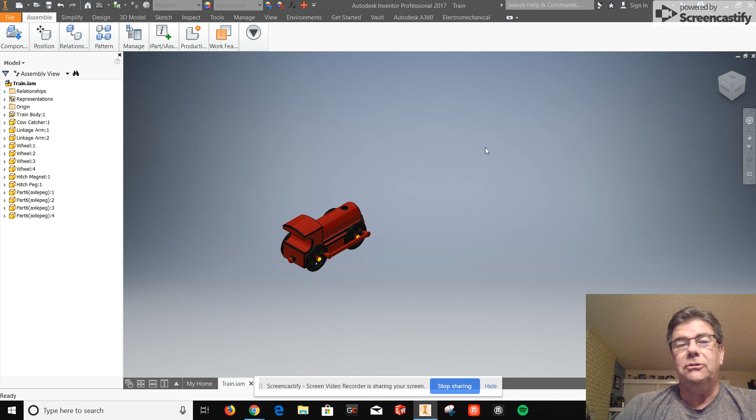I want to show you how to constrain the train to the track. So once you have your train assembled inside of your assembly, go ahead and place your track.

Hit open, there's your track right there. Just bring in one piece of track to begin with. Then we want to constrain.

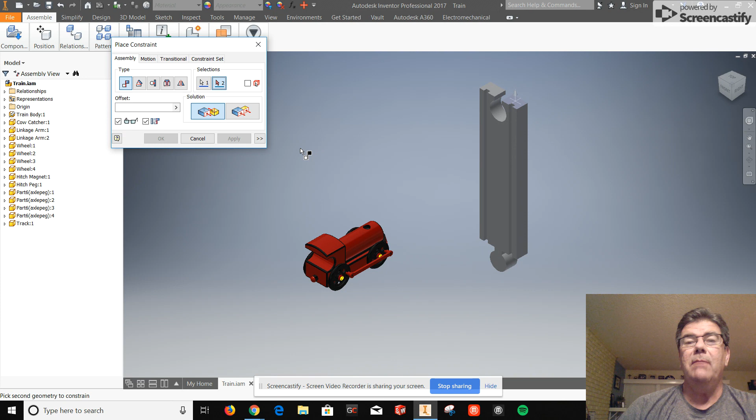The back of the track, we want to make that flush with the back of the train. Something like that. And then we hit apply.

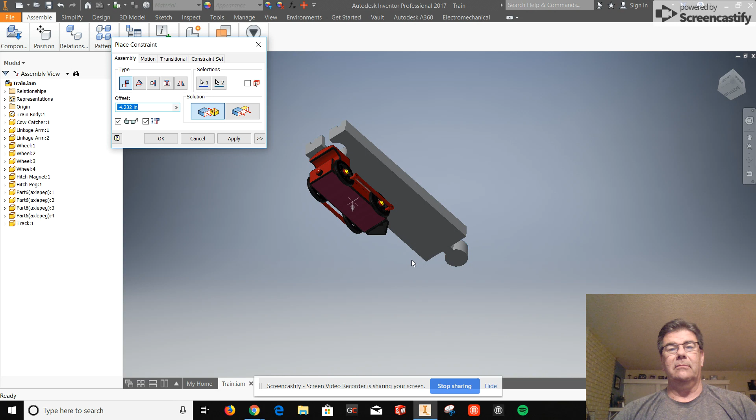And then we want to take the bottom of the train and make that flush, actually mate that with the top of the track. See how I have this negative 4.232 offset? I want an offset of just 0.4, and now my train is on the track, and I hit apply.

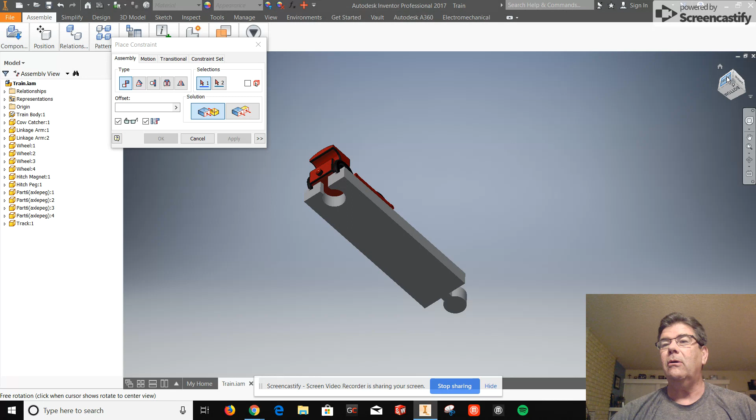So when I go back to home, oops, there's my train on my track.

And it's grounded for some reason because the train body was grounded when I was trying to fix the tires before. So I'm going to go ahead and unground the train.

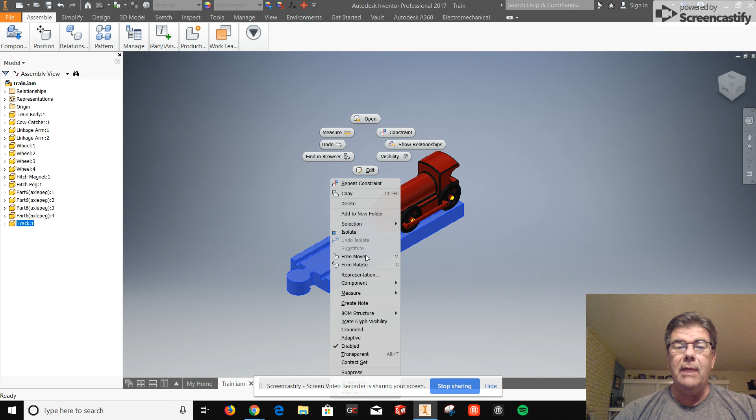And then I do want to click and ground the track. So I unground the train and then I grounded the track, and now the train is able to move on the track the way I have constrained it.

Now I need to do one more constraint on the train, and then I'm going to loosen that back constraint and let that one go.

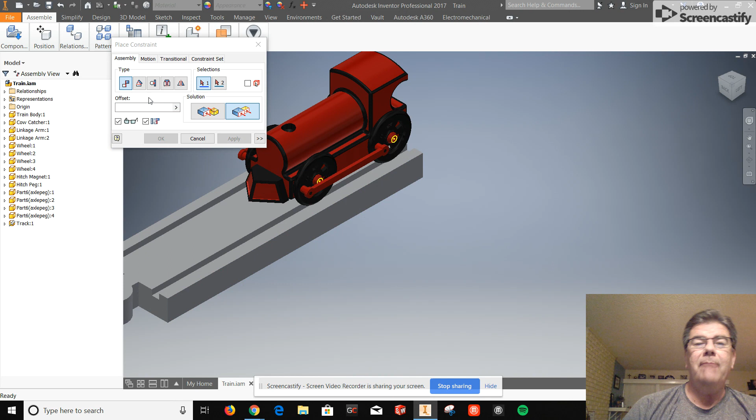So I need to constrain the train to the side of the track, and I need a 0.7 offset, 0.7, and that puts the train inside the grooves. I hit apply, and I close this box, and I open up my relationships.

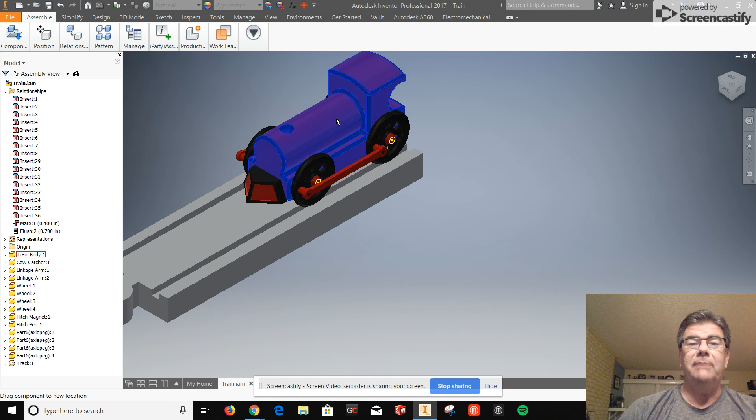Now remember that first flush that I did. I want to now delete it. And that allows me to test my train to see if it'll go on my track in this direction, and it does. Isn't that awesome?

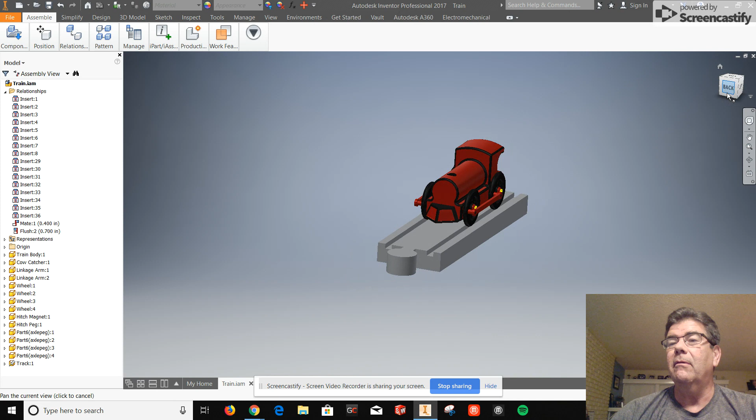Okay, so that wasn't too hard. Now I sort of played with my block here. So home view gives me this look, but I want to go to my back view, which really is a front view, and I want to go to my front view as a back.

So now I'm in the back of the train, so I can see, am I lining up with the grooves? And now I can go back to my mate of 0.4 inches, and I can get those wheels to fall down on the track. So what I want to do is go and edit my offset.

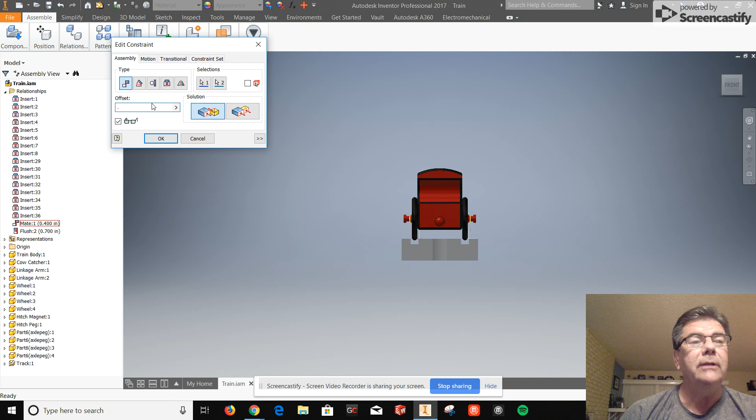I have 0.4 inches. Let's change that to 0.2. And that drops me right on the track.

So now that my train is on the track, now I have to animate it. So now I'm going to go back to my home view, which I have tricked out to be this view here. And what I want to see happen is, these need to be moving, but they also need to be moving in unison.

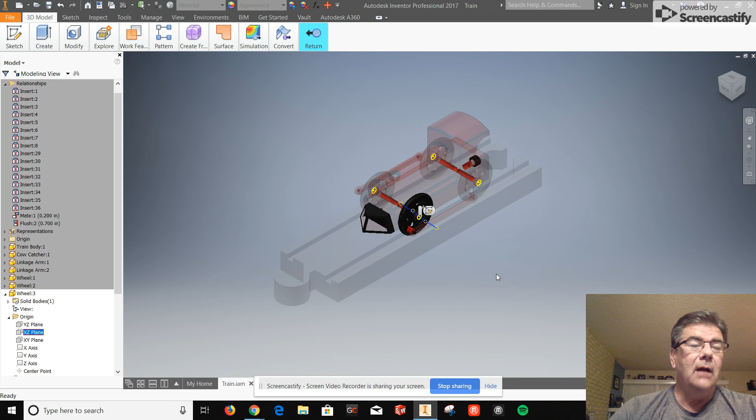So what I want to do now is click on one of the tires and isolate it and go to the origin of the wheel and turn on the XZ plane. And when I turn on the XZ plane, I can see that that is what I want to have visible.

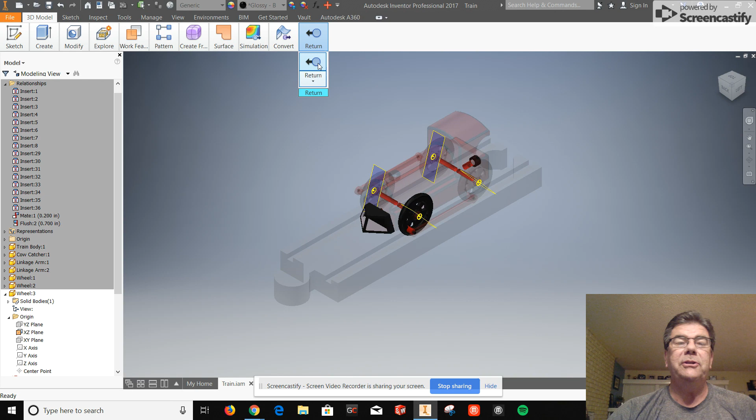Turn on all the wheels, and I hit this blue button here to return back to my full assembly. So now that those are committed and visible, we can now play with these.

They need to have an angle constraint between them that is 0. So on this side, this wheel, this plane, the XZ plane, I need to put in an angle constraint. So I change from the mate to the angle, from the mate to the angle.

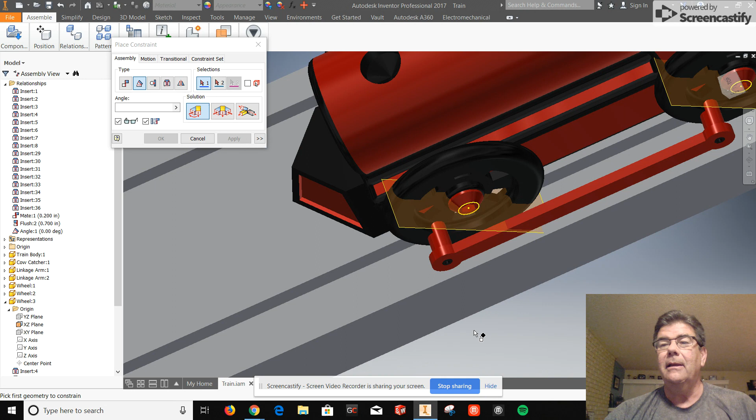I click on it and I go here and I constrain this plane with this plane, and I go to angle at 0 degrees and I hit apply. And that snaps onto that. So that angle constraint now exists, and you can see it over here in your relationships file.

And now I need to turn to the opposite side. So I'm going to go home real quick, and then I'm going to flip my block around to the opposite side.

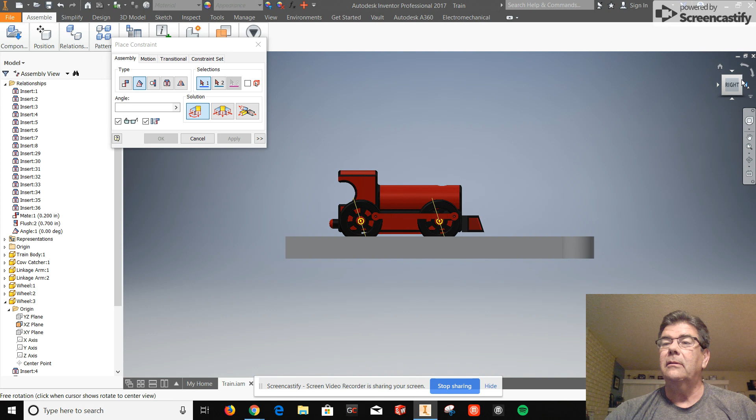And now I'm going to find this plane and put an angle constraint in between these. So I want to choose this plane and this plane and snap an angle constraint on those at 0 degrees and hit apply.

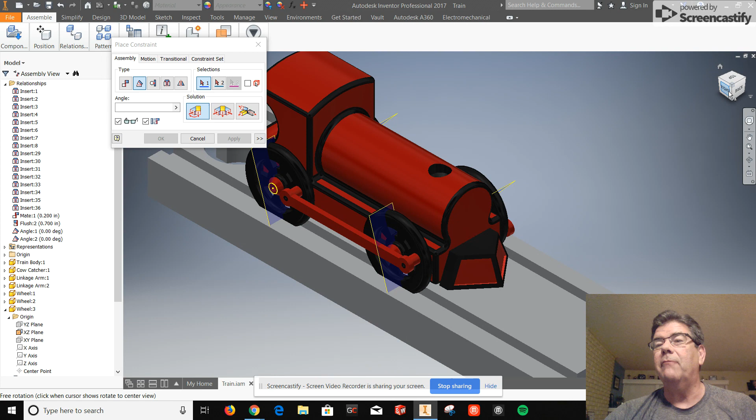Finally, I want to go to my front, which is really my back, bring this in, and I want to put an angle constraint in on both wheels so that the wheels will turn together as they go down the track.

So I put an angle constraint on this side, an angle constraint on that side, and my wheels are now at, let's do 0 here. I got 57 degrees. My wheels are now at 0 degrees.

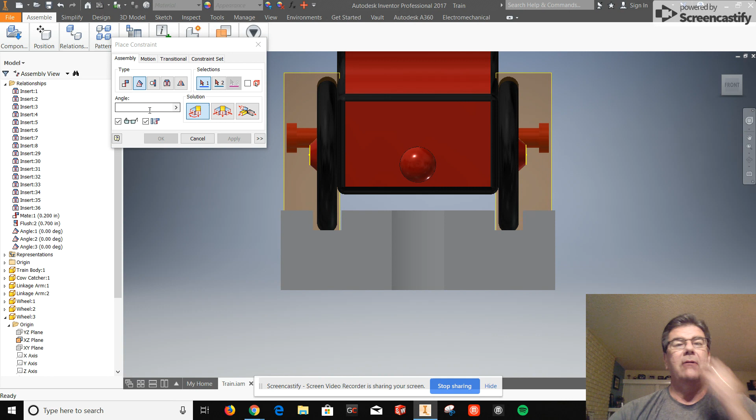And you notice how my followers over here on both sides have lined up, which is pretty awesome because that's what I want.

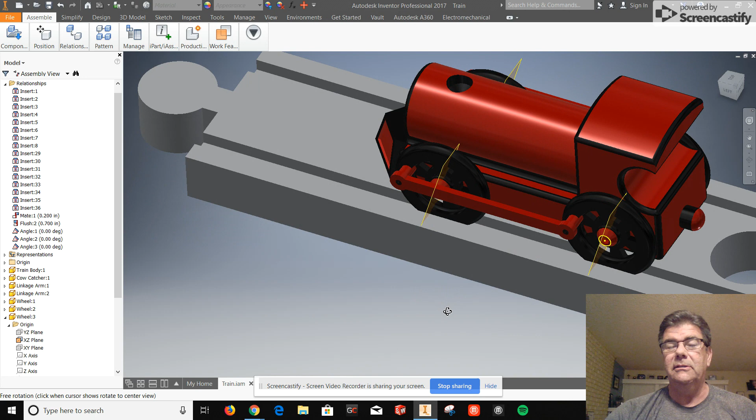So now I'm going to go ahead and close the box, and I'm going to test out to see whether my animations actually worked. So how I do this now is go like this, and if I animate it, the wheels on both sides should turn with each other.

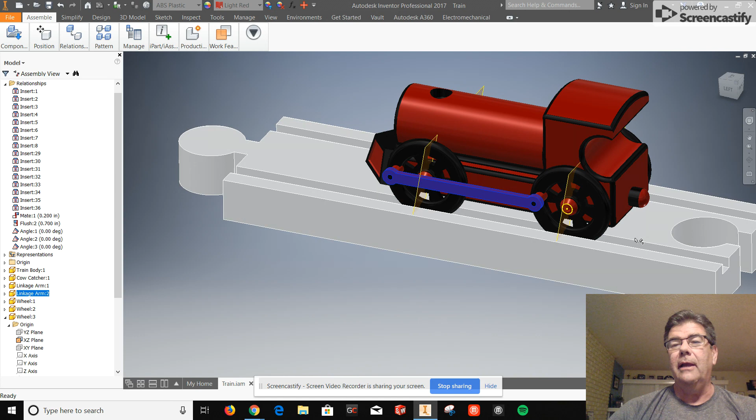And at this point, I am done with this first animation, and I'm going to stop this video and go to another video to teach you how to make it go down the track. So that's the first part of the animation, and I'll see you in a little while.